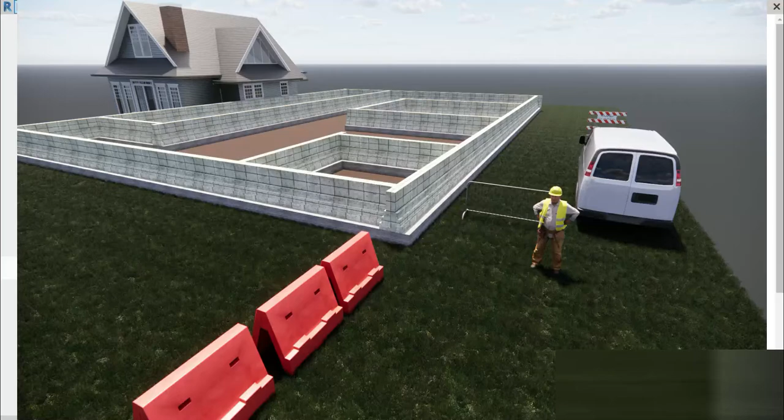Today we are going to be making a load-bearing wall foundation. We're going to be designing that traditional wall, a load-bearing foundation, isn't it? It's mostly used for residential houses or even commercial spaces that are overall small in size.

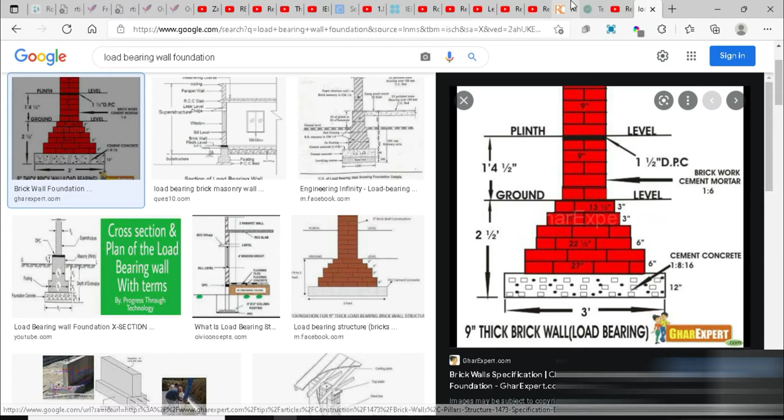Instead of starting everything from zero, how about we go to Revit City and start it from a stepped foundation model. Once we download this model, we can upgrade it and open up, and get started right here. For example, if we go to the left view, this is our left view, and we are going to be editing this. If we go to 3D, this is the load bearing wall foundation.

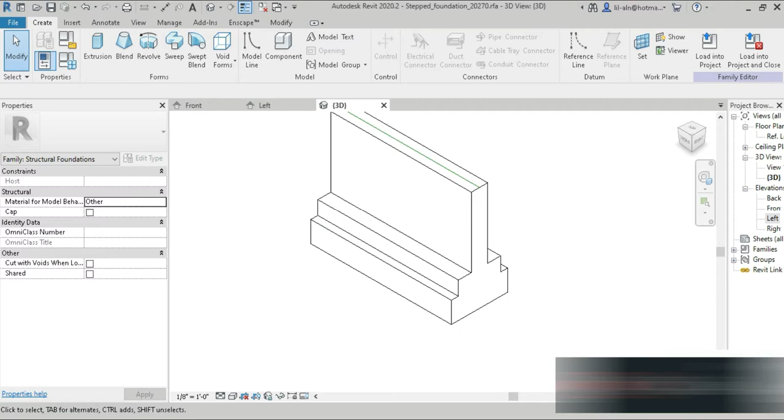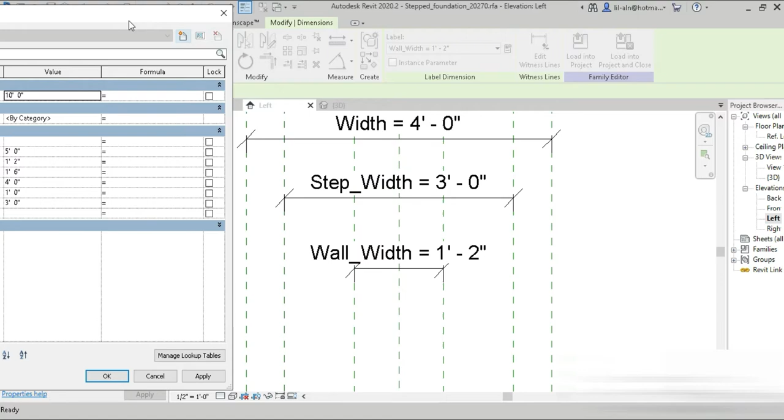Alright guys, let's quickly get started with this. Let's go to our left view. So this is the data that comes with the model we have downloaded. The first thing is this wall right here, this is wall width, so let's change the parameters. For example, this one is wall width, 1 feet and 2 inches.

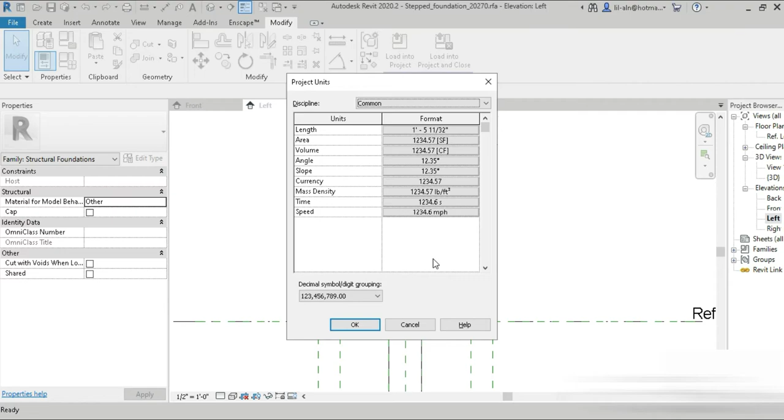This is the one, let's rename this to first wall width, and let's give it a thickness of 9 inches. If you press OK, the first one is already changed. In order to make things more clear, let's go to units and fractional inches, to the nearest half.

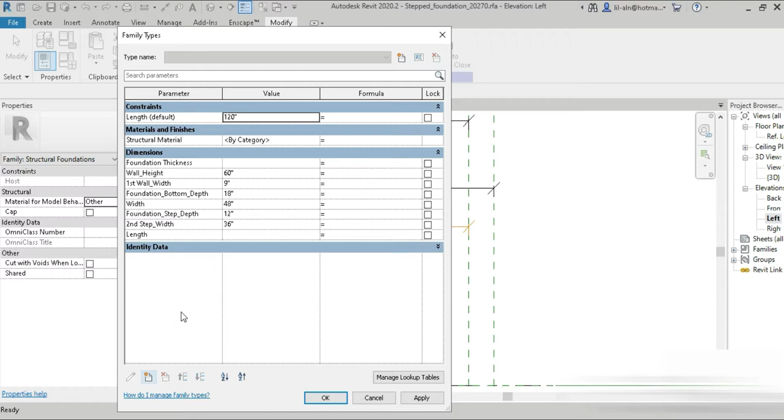So the second one is step width 36. Where is it? This is the one. So edit, and the second step width. As I previously said, the more we move down, there's an addition of 4.5 inches, right? So if the first one is 9, the second one is going to be 13.5. Alright, so that is done.

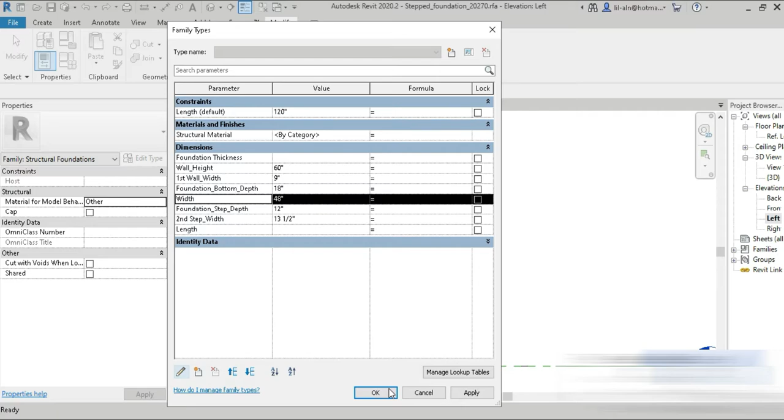Now the third one is width 48, this is the one, isn't it? But oops, we cannot edit that because it is a built-in parameter, so we cannot even delete this. Okay, how about we just delete this from here, and we go and make a parameter, and then let's click that. Let's rename it third step width. Okay, so that is done.

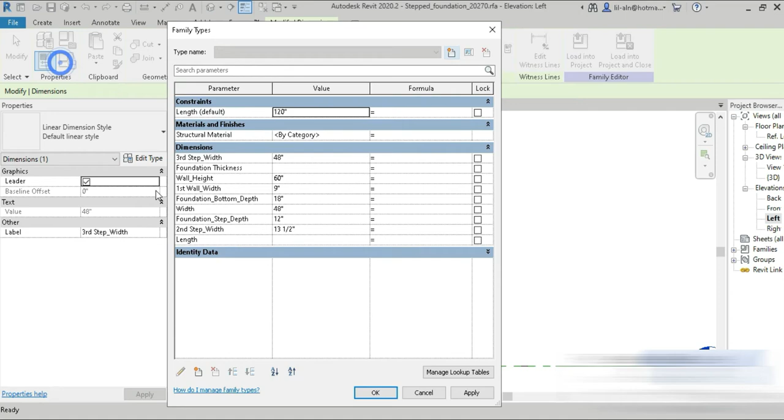So the first one is 9. Let's go up, the second one is going to be plus 4.5, so 13.5, and the third one is going to be plus 4.5, so it's going to be 18 inches.

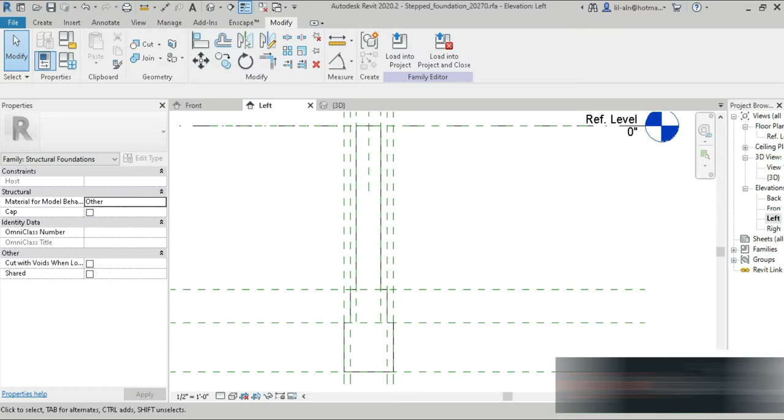And as you guys can see, our progress is on point, right? So very easy. And now we do need another step, so let's quickly make that.

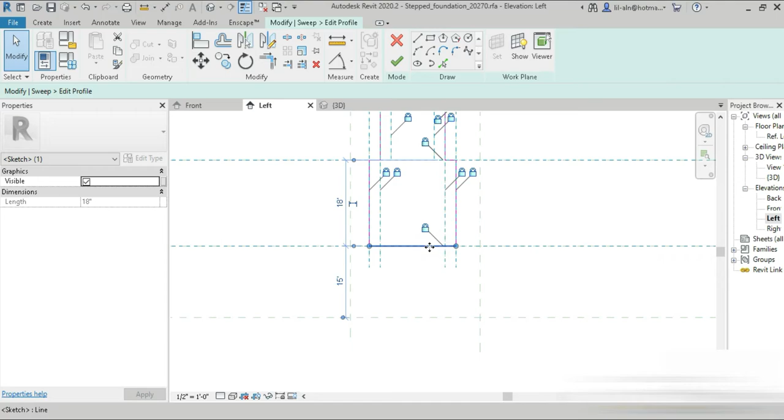Let's click on this CO, and right here CO, and right here CO. Okay, so let's extend this a bit down. So edit sweep, click on edit profile. Let's delete that, and let's make our profile. Let's make the last step very simple.

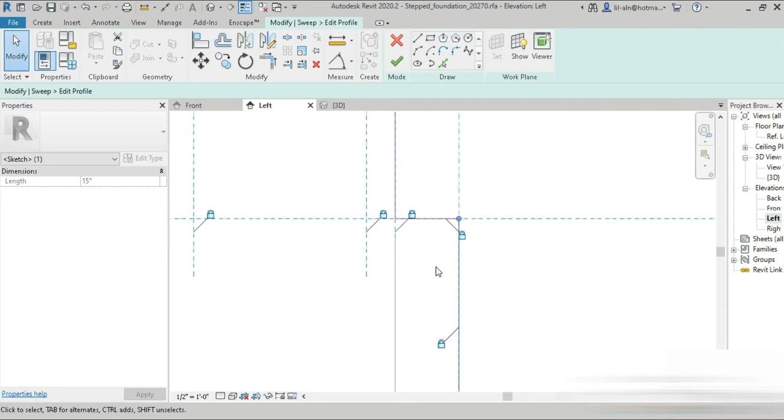So in order to make this parametric, of course, we would have to lock these axes. So up and down, lock, and right and left, the same thing, lock again, and up and down, lock, and right and left, lock again, and up and down, and lock.

Here you go. And now the dimensions. So DI. So this is the one, isn't it? If we go to here, how about we paste this?

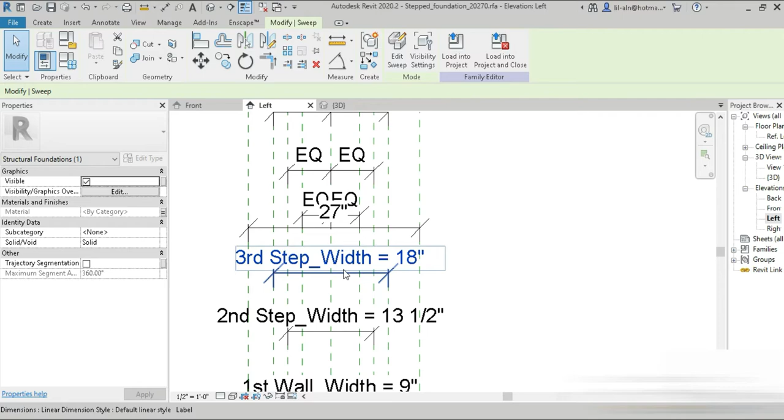Let's first of all finish our dimensions, and we even need this constraint right here. This is extremely important, otherwise we're going to be having errors. So DI 1 half and half, and right here, let's press EQ. All right, so we have added the constraint and we have added our dimension.

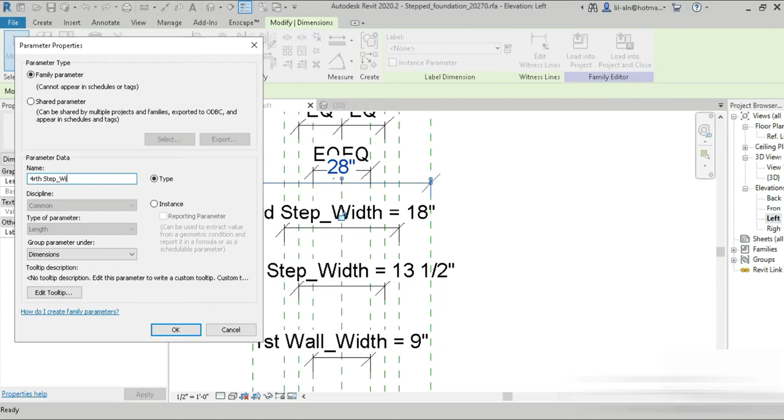Now if we go to the next one, this is going to be the fourth step width. And now let's go to family types. So this is fourth step width right here. So the first one is 9 plus 4.5 is 13 and a half, plus 4.5 is 18, plus 4.5 is 22.5.

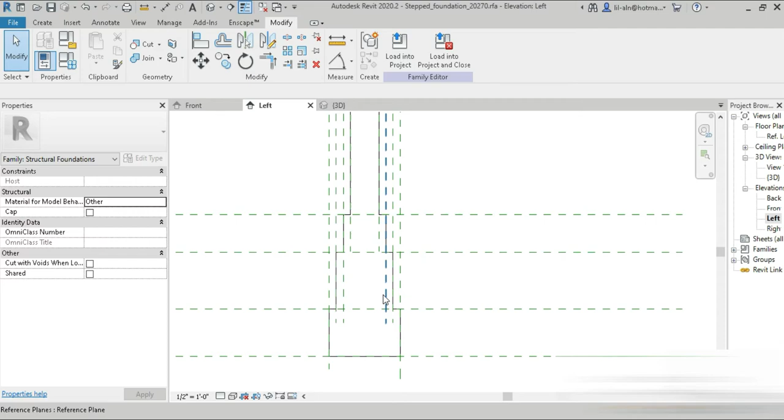And as you guys can see, we are almost done. So this is a load bearing wall foundation, all right? Very simple, nothing complicated. Now, as far as the heights are concerned, it's going to be the same process all over again. So wall height, let's click on this.

Wall height, this is on, isn't it? So edit, and this is going to be first wall height, and this is going to be 1 feet and 6 inches. Okay, we have successfully changed that.

This is the foundation step depth 12. Foundation step depth 12, this is the one. So this is going to be 2, and the second step depth, and second step depth.

Right, this is the one. So the first one is 1 feet and 6 inches. The second one, all of the other layers are 6 inches, it has a thickness of 6 inches. A depth or a thickness, both of them are the same thing.

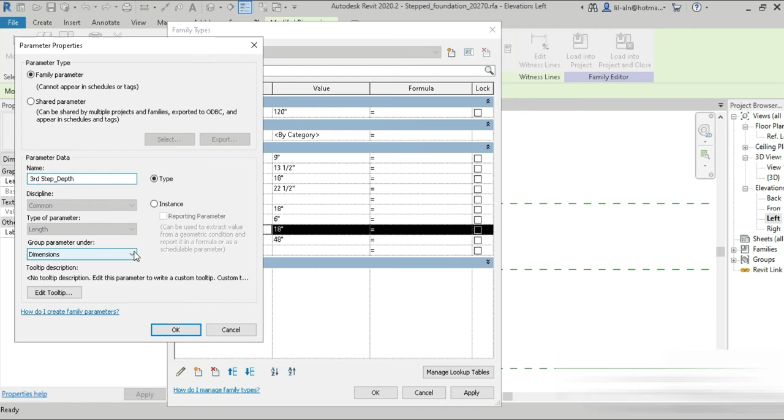And the third one is this one right here. So how about third, third bottom depth, or third step, and delete. Okay, done. And the third one is also 6 inches.

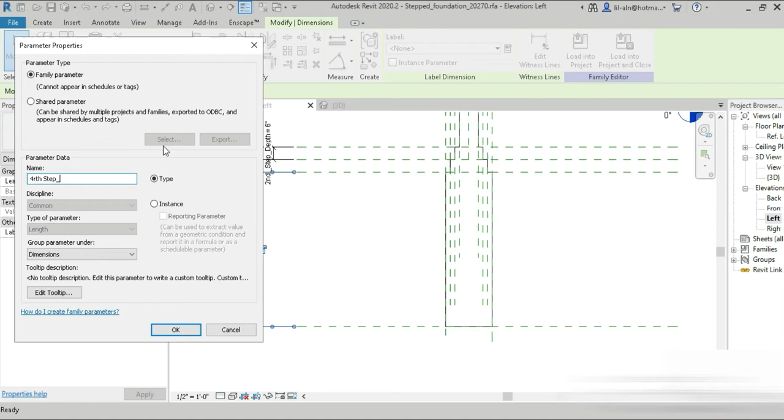And now we need to add another one for the fourth. So DI right here. Okay, so let's make a new parameter. This is going to be the fourth step depth. So this is going to be the same, where is it, fourth step depth. This is the one, isn't it? So down, down, down, down, down, and this is going to be the same as 6 inches, right?

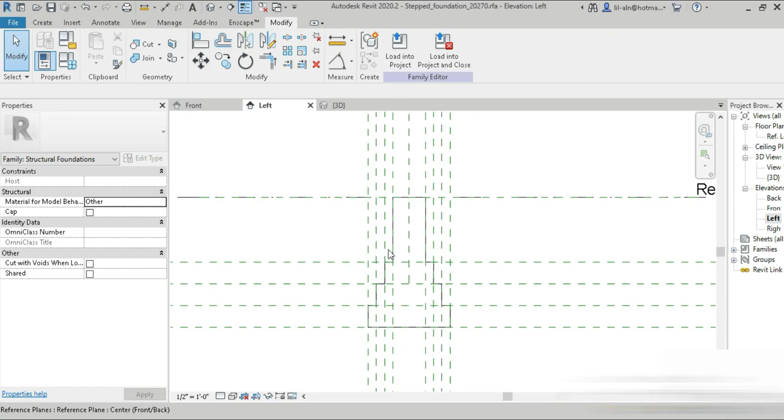So here you go, guys. So this is our load bearing wall foundation, and we are complete already. And let's even quickly make the PCC. Why should we leave the PCC out? So click on this CA down, because it takes so little time.

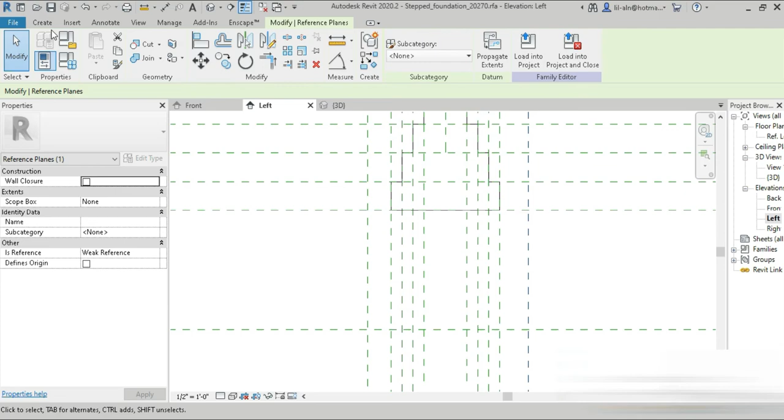CA left, nope. CA right here, and CA right here. And for the PCC, let's make it a separate component, separate element. No, we don't want to attach it with this. So we have made a rectangle. Let's lock all of our axes, and done.

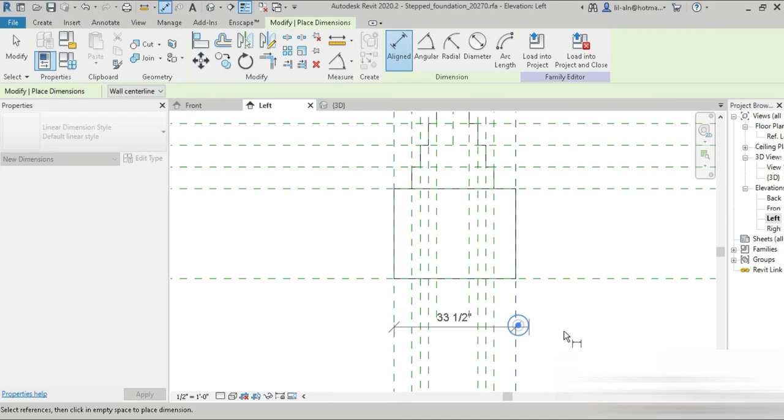Okay, so now DI. So this is the first dimension, and we even need to include the constraint. So in the middle, right? EQ. Okay, done. And this is gonna be right here.

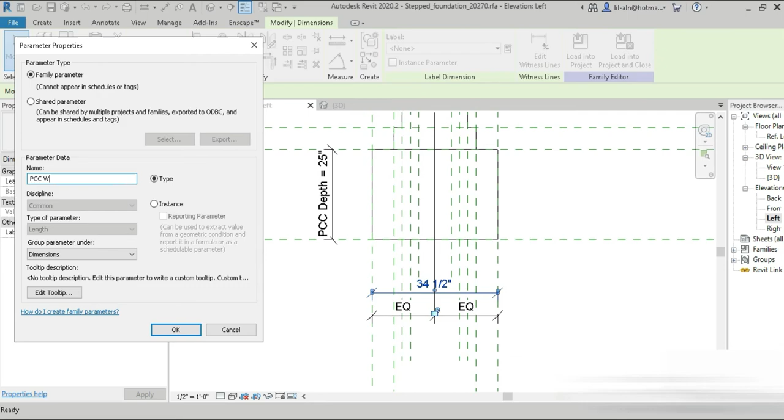So this is going to be the PCC depth, PCC depth, and this one is going to be the PCC width, width. So now if you go to our family types, PCC depth, so the depth is of course 12 inches, and the width is going to be 3 feet. And here you go, so we are complete.

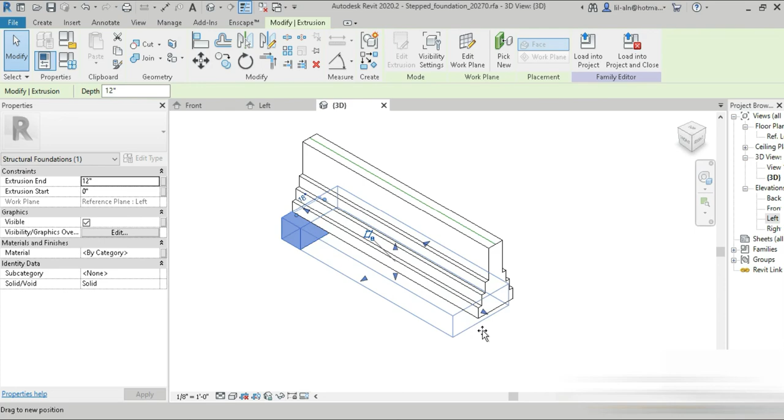Now if you go to our 3D view, so this is what we have made, and if you just extend this to this point, and then if you lock it, so we have locked our PCC with our foundation. Now wherever we include or stretch this, it automatically is going to stretch because we have locked it with that, right? So this was part one of our load bearing wall foundation.

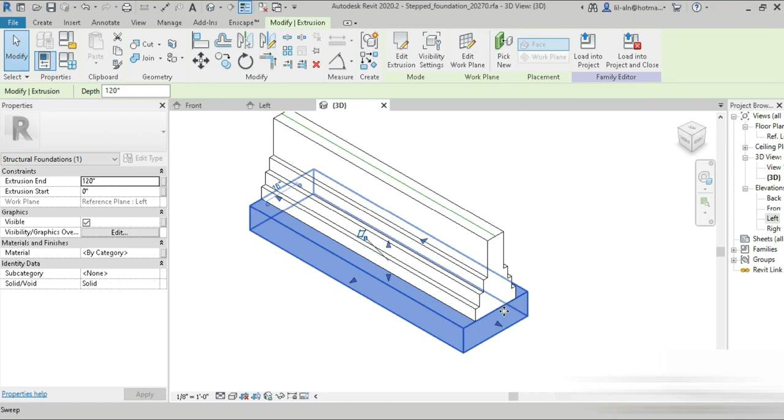There are a total of 3 parts to this video, because in the next one we are going to be making another one which does not include this side. For example, if you have another property or another house on your left side or right side, this type of foundation cannot include that. You would have to add the one which does not have these steps, so these steps are going to be transferred on the other side.